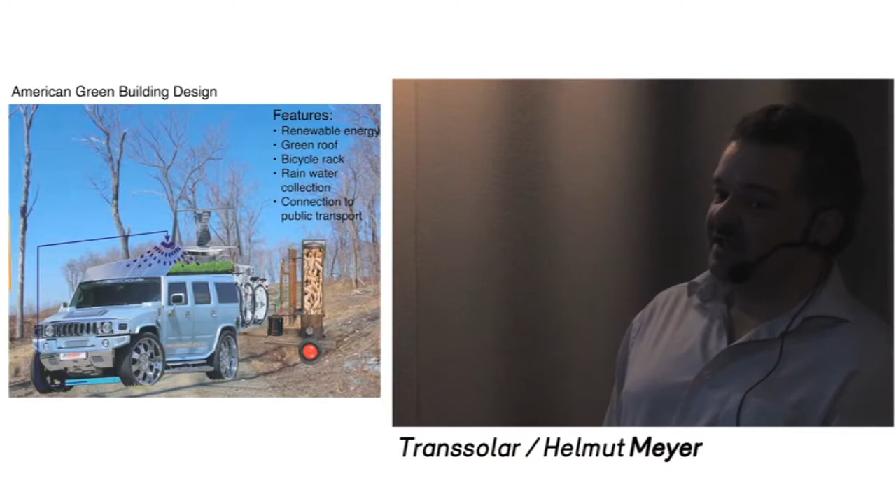So certification labels are really a kind of hype now. I think LEED was one of the first, started roughly 20 years ago. But there's a certain risk of abusing these kinds of systems. Those systems are not a design tool, none of them—not BREEAM, not HQE, not LEED. So it's a good checklist. It was really beneficial for the whole discussion, but it doesn't substitute a holistic design approach.

Taking a usual product and adding green gadgets to it doesn't make a good product at the very end.

So, a couple of examples. I think I have to dedicate a couple of my gray hairs to this project, but at the very end, I think it's a nice piece—the Mercedes Museum in Stuttgart.

The funny part was that first they did the exhibition itself, so the design of the exhibition was done, and that was part of the brief for the competition of the building. So the task was to do a building around this exhibition. Ben van Berkel and his guys did a very good job, but it was a cutting-edge project in a lot of aspects—structurally, and even mechanically, it was really a very difficult project.

Because we had to hide more or less all the technique in the concrete. And if you imagine, we have a lot of steel in this concrete, and then we have to embed all the mechanical systems, air ducts, sprinklers, all the lighting—whatever it was. So site supervision and coordination on site was really a kind of nightmare.

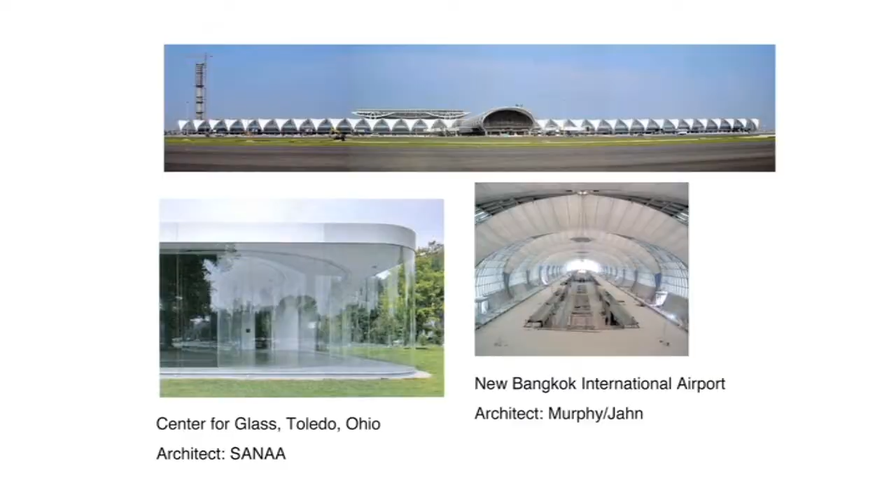Another one of our biggest projects was this airport with Murphy/Jahn, and it was not a typical project for us because we more or less stepped in when the schematic design was done. The problem was that at the presentation of the schematic design, an expert hired by the client more or less tore the whole design apart.

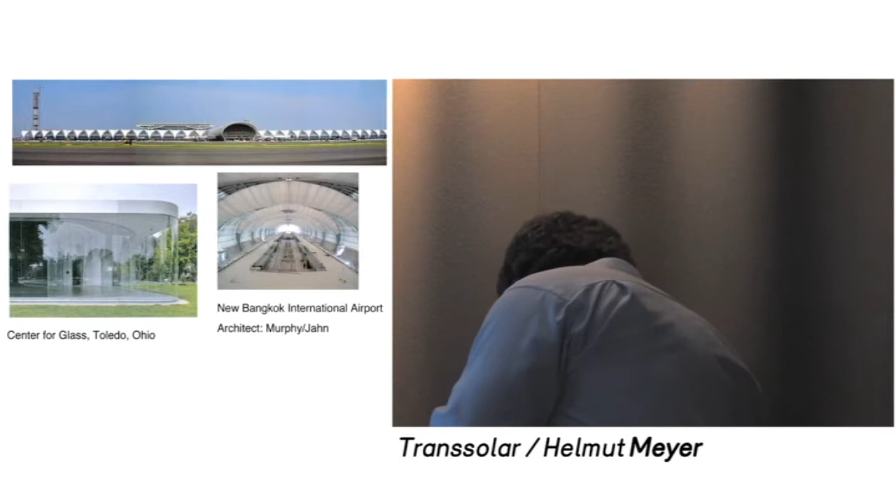Sorry. Tore the whole design apart.

And the architect was really furious after that. It's a $12 billion project, and he said his engineers were assigned to him and didn't comment on anything. The problem was that it was a single skin, so it was too noisy, too bright, too glary, and the climatic conditions were awful. So we worked on improving the design, adding several layers with specific parameters to improve it.

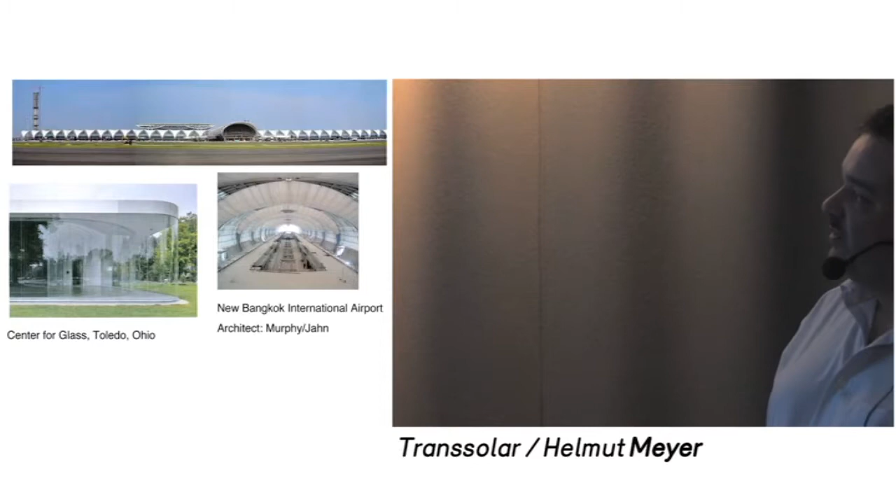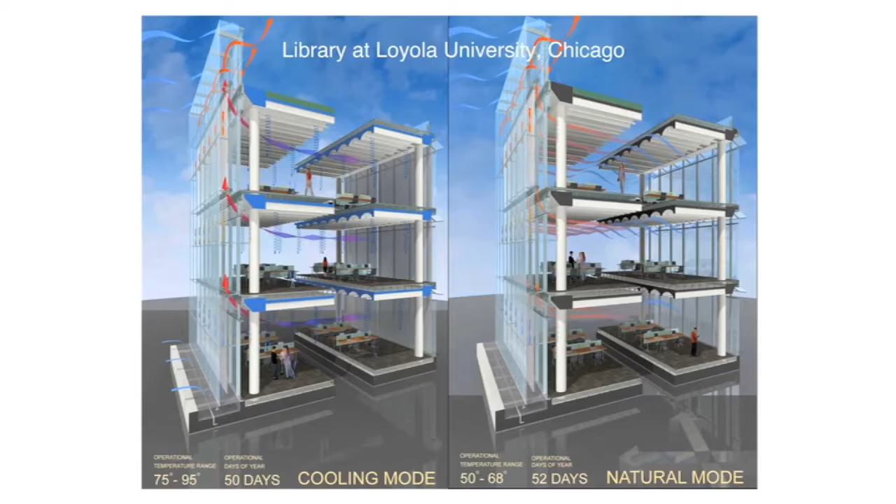This little project we did for Loyola University in Chicago. The requirement of the client was that his students need education, but also a kind of socialization, because it's typically the first time these kids are away from home, so they should learn how to live with people, and it's necessary to provide a place where they can meet. By using all the IT equipment and the internet, he was concerned that students are sitting at home doing everything on the PC and not meeting or talking to each other.

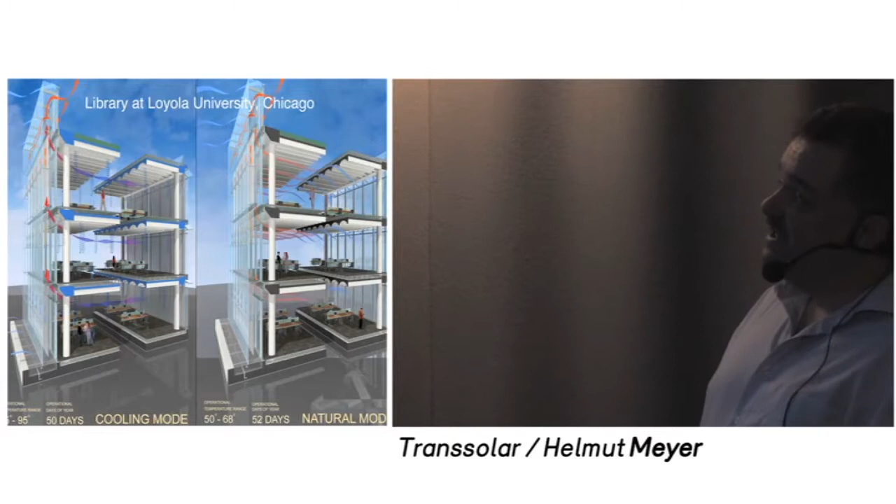So the goal was to do a library which attracts as many people as possible. Looking at the building, it's a very simple building. We have an active slab, and the shape of the ceiling is a kind of reflector of the lighting. This idea of integrating several functions into one component.

Was more or less the driving factor to keep it as simple as possible. Two years after the grand opening, the dean was very proud that even at midnight they had up to 1,200 people in their library, and it's more or less at the lake, here's Lake Michigan, and it's really a gorgeous place to be there.

So what will happen in the future? I think we are out of the discussion that green equals self-knitted socks and eating more organic food in the countryside. And I think even these poor little guys providing energy for this grid-independent building will not solve our problems.

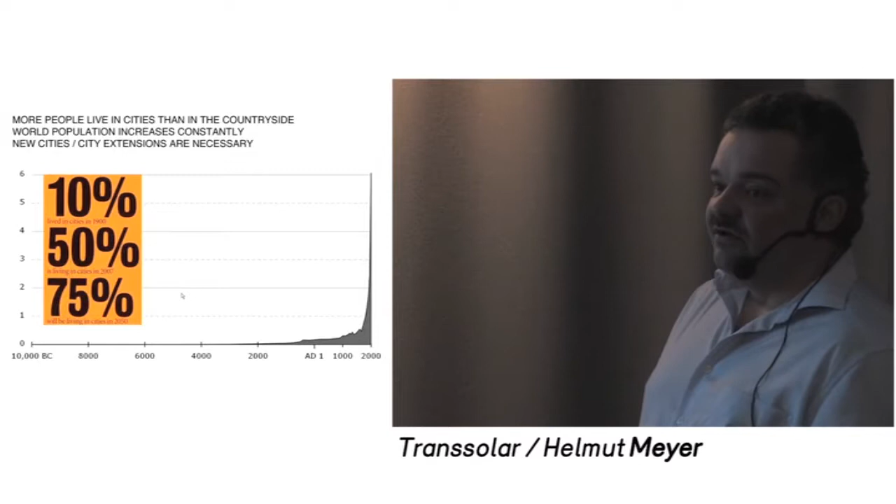So I think the big challenge, if you look at more and more people living in cities, the city itself is one of the biggest challenges in the near future. Maybe not in mid-Europe, maybe not in this part of the world, but looking at Northern Africa, China, India, there is really amazing growth in the cities.

So what are the qualities one needs for cities? I think density has a certain impact on the amount of energy we use for transportation, and also an impact on the quality, the vibrant city life we can achieve. Looking at this kind of suburban culture, which developed from the 70s till the 90s, it's really devastating. So what are the aspects of a green city?

I think for sure we have the energy aspect. Especially, I know Germany very well, and in Germany, sustainability equals energy. That was the main message for the last 10 years. Now we started to open up and consider additional aspects, and I think we are at the beginning of it. It's really essential that we take all these aspects into consideration.

So for a city, outdoor comfort has an impact. And for sure, what is the identity, the local identity of a city. Recently, I won a competition for a high-rise in Addis Ababa in Africa.

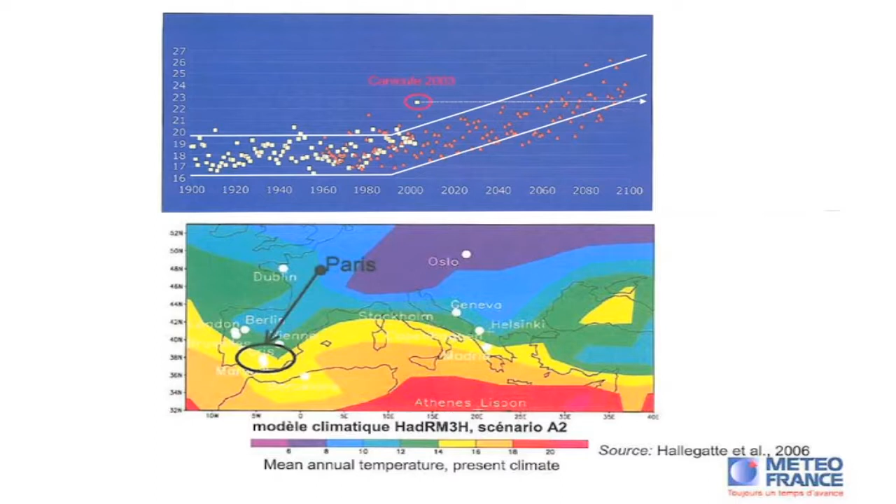Here's a study from Météo-France, and they tried to assess the heat island effect of Paris. So that's the Paris area, and here is the Paris area at nighttime hours. I'm not sure if you can read it, but the temperature in the city area drops from, say, 32 during the day to 27 at night. If you go out of the city to the countryside, the temperature is typically 7 to 10 degrees lower.

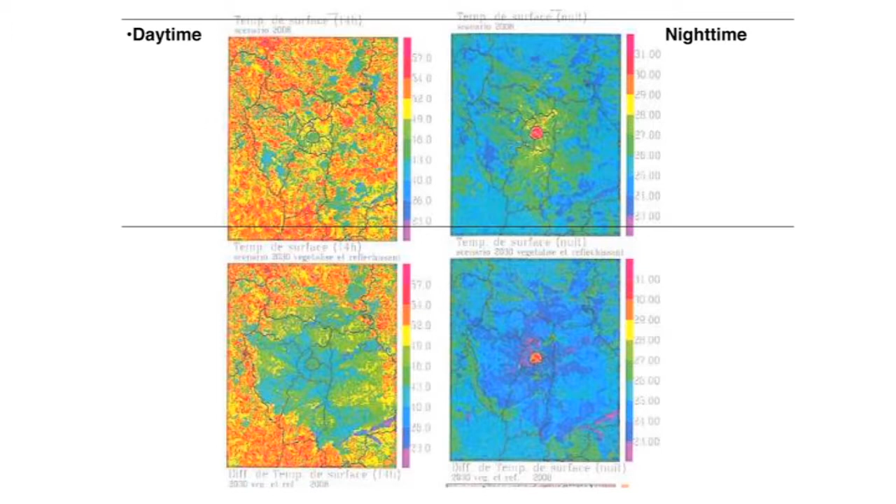One of our typical principles is that we need the thermal mass of a building, using lower outdoor temperatures during nighttime hours to cool down the thermal mass and have a cooling potential for the next day. But in a downtown area where the temperature doesn't drop during nighttime hours, we cannot use these kinds of principles. So what can we do?

In this simulation, they used green spaces in the city, added high albedo roofs, and added green roofs where appropriate. It was a kind of dynamic calculation, and only by these very simple measures were they able to cut down nighttime temperatures to a high degree. So there are ways to do something - there's no reason not to do something.

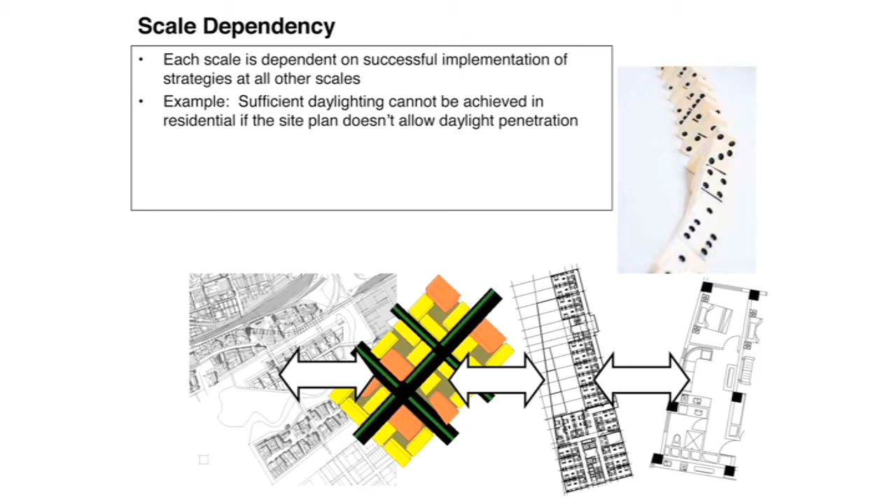This scale dependency is very essential. We need an optimized master plan to get optimized buildings in there. As soon as we have one bad part in this chain, it's really hard to achieve highly efficient buildings. So at each step, we have to apply a high level of scrutiny to achieve a good result.

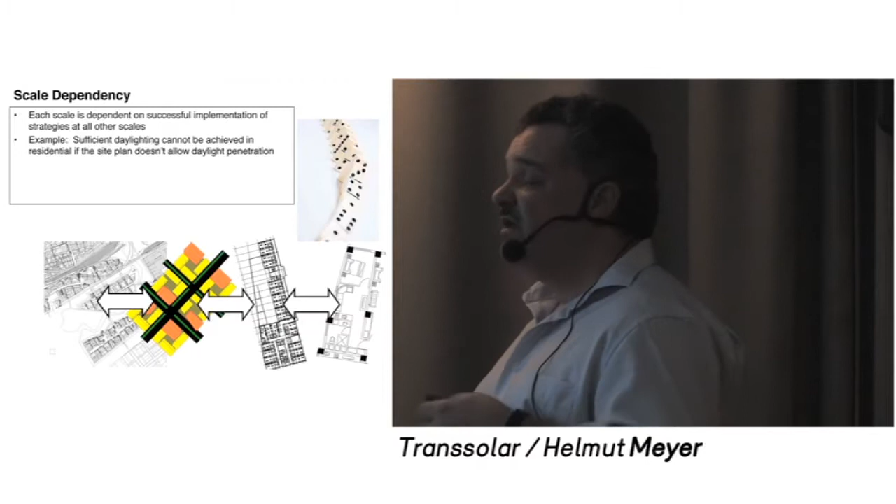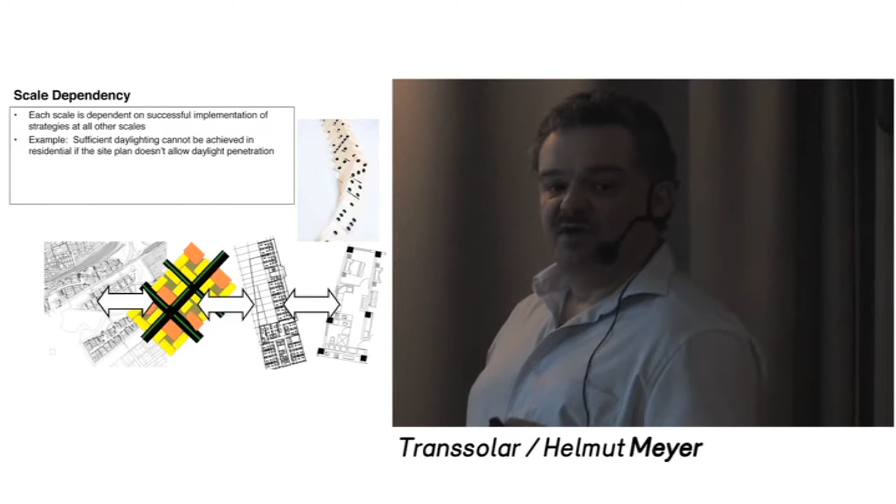Even at the master plan stage, we have this iterative process where the architect came up with a massing study, then there's an assessment in terms of solar and daylight access, wind and outside comfort, carbon emissions, and then it's a back and forth to optimize the design.

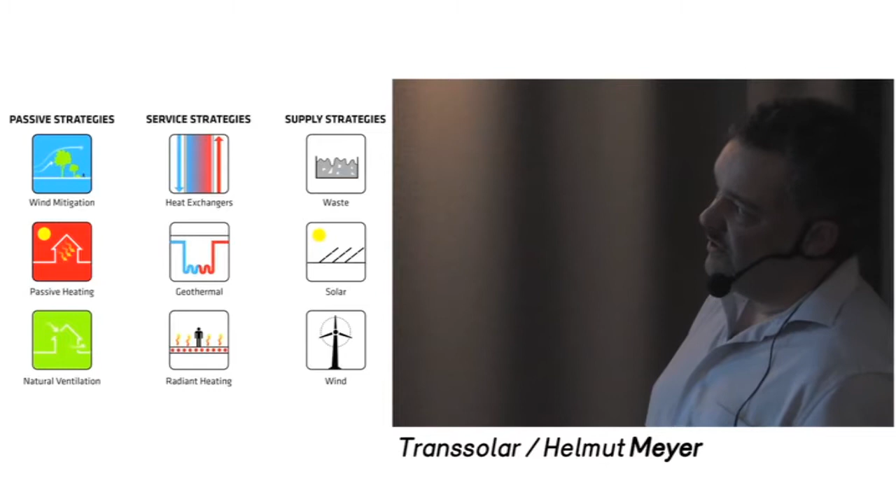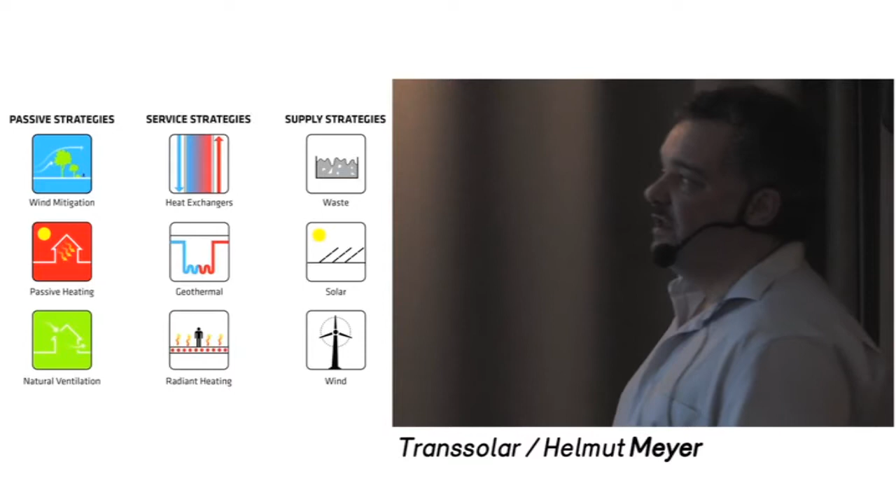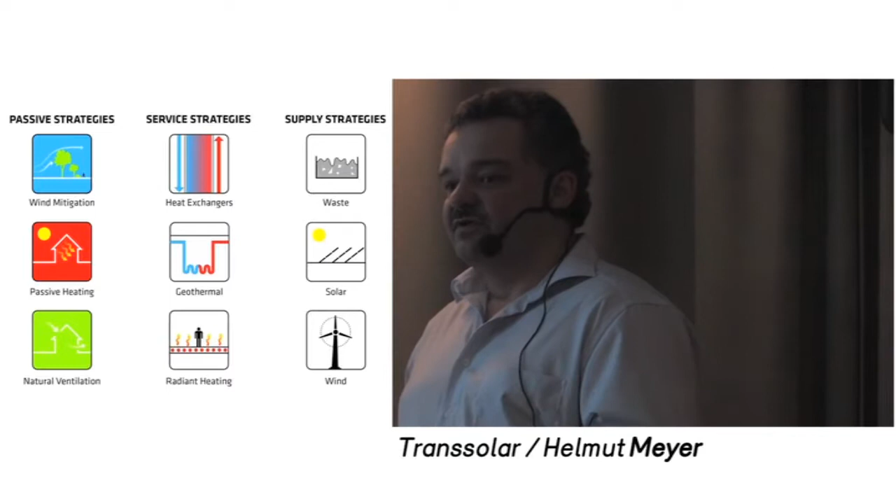Maybe it might look like that. Typically we have three steps in the optimization process. First, we try to maximize the passive performance of the design - wind mitigation, passive heating, maximizing solar gains, or natural ventilation. Then, by defining the efficiency level of the buildings, we could discuss service strategies - what kind of systems we'll use for distributing energy into the buildings, which has an impact on what kind of energy resources we might use. It's not really sequential work because there's a link between each of them, so it's back and forth.

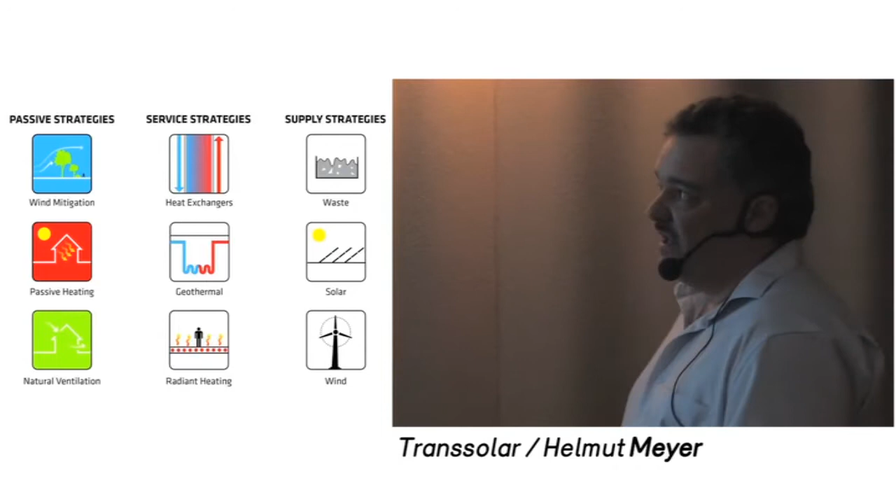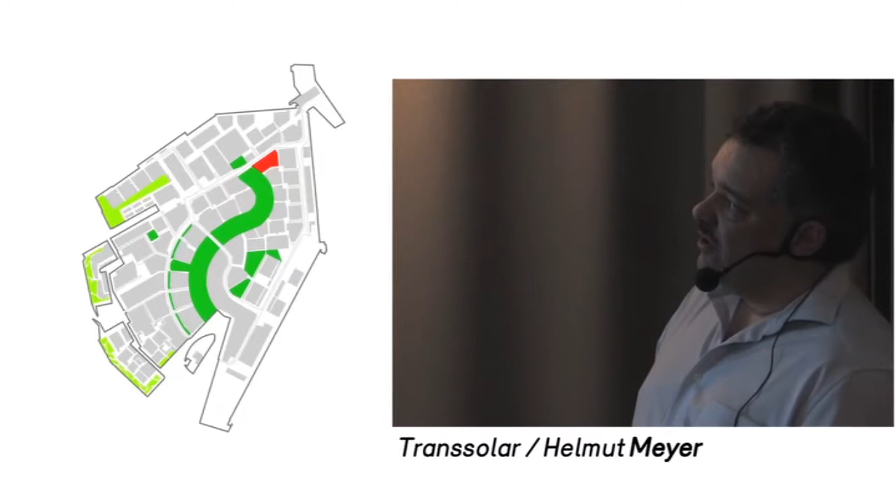A little problem for this competition was that there was an existing master plan, which from our opinion was not really optimum. So now we are following one of these blocks - you can put a block in.

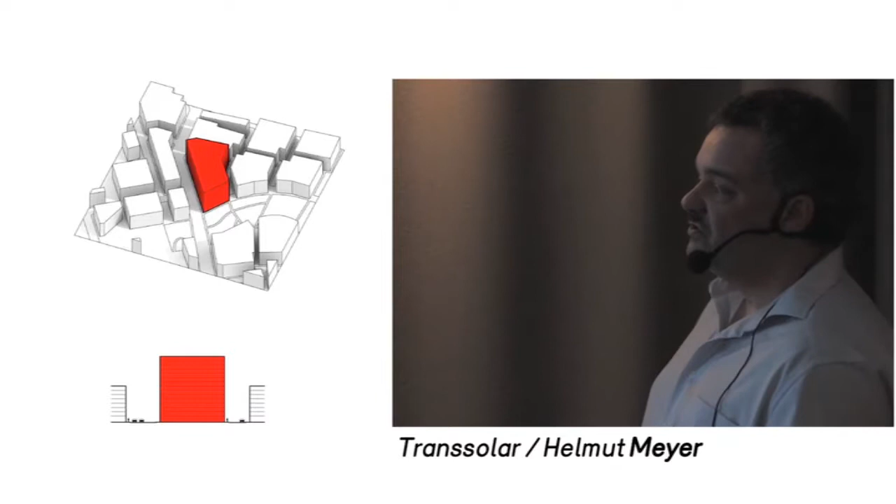At the beginning we discussed, for a city like Helsinki, what is an important impact? The lack of sun in winter seems to be one of the most crucial things. So for south-oriented facades of the neighbors, we want to ensure a certain amount of hours per day of direct sunlight. We cut the roof to make sure this guy will get enough sunlight due to our definition.

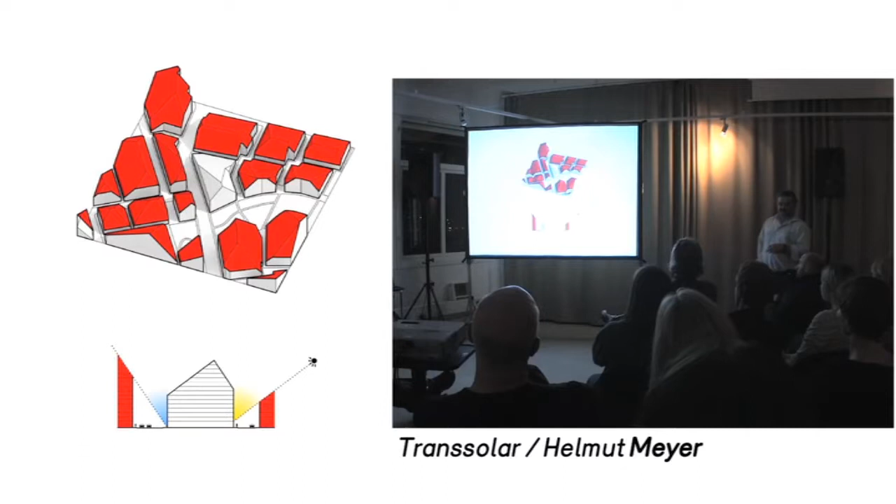For the neighbors to the north, we said they need a certain daylight supply, which gave us another shape for the roof. And BIG was very straightforward and applied these principles to their design.

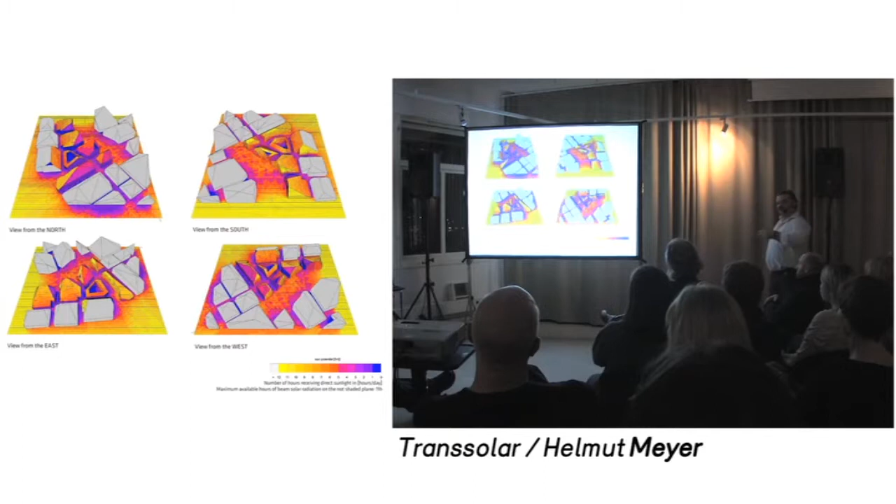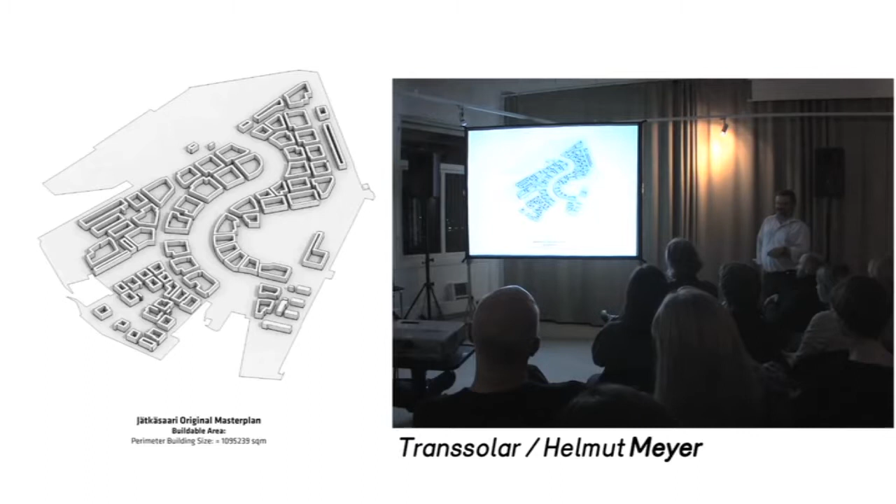Here we had calculations for different setups or areas of the master plan - what is the impact of this shape of the building? I think that was the point when it was clear we would lose this competition, because that was the original master plan, and with our implication we increased the facade area we have to build by, whatever, 30%.

But in an internal discussion, we loved this way of design, so we thought to go on with that.

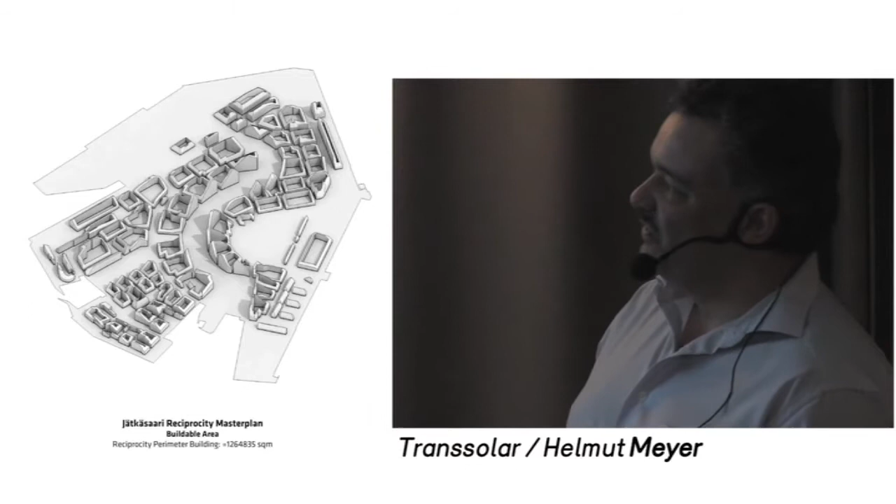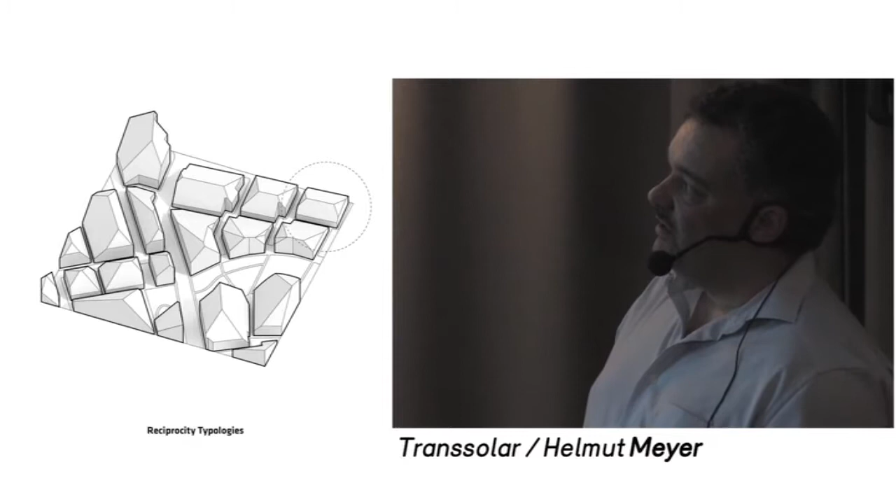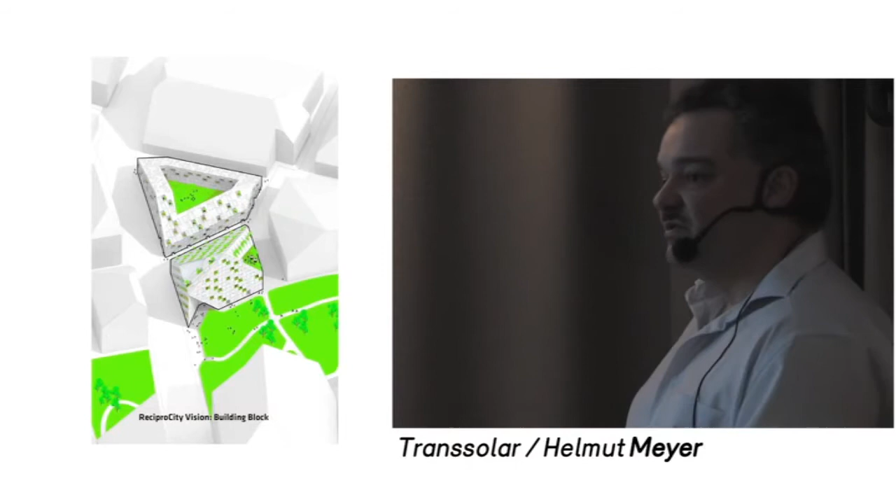So now we're switching from a block or grid scale to this block scale. The architects developed several different approaches, and we did a brief assessment of them in terms of energy performance, or what kind of program might be hosted in these blocks - penetrations for circulation purposes, indoor courtyards - and then how that might show up in the master plan.

What is the ideal program at certain locations in the volumes we created? So office space, more or less, to the north and northeast, and the residential parts elsewhere.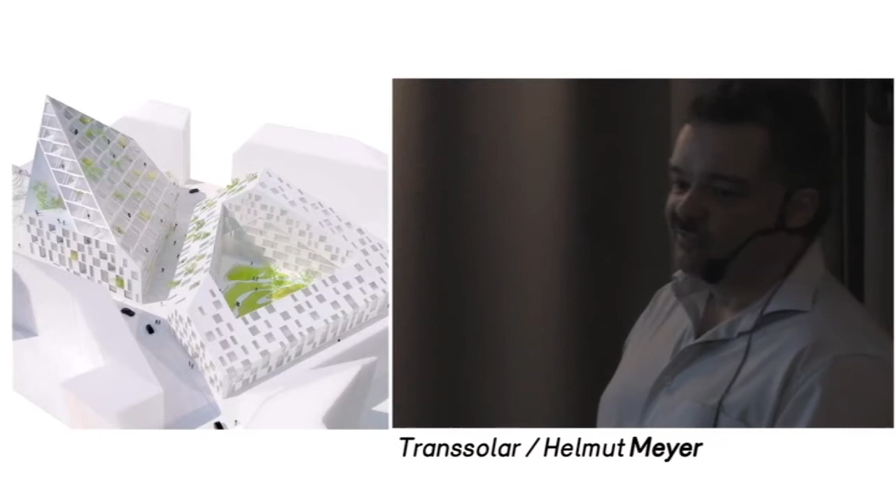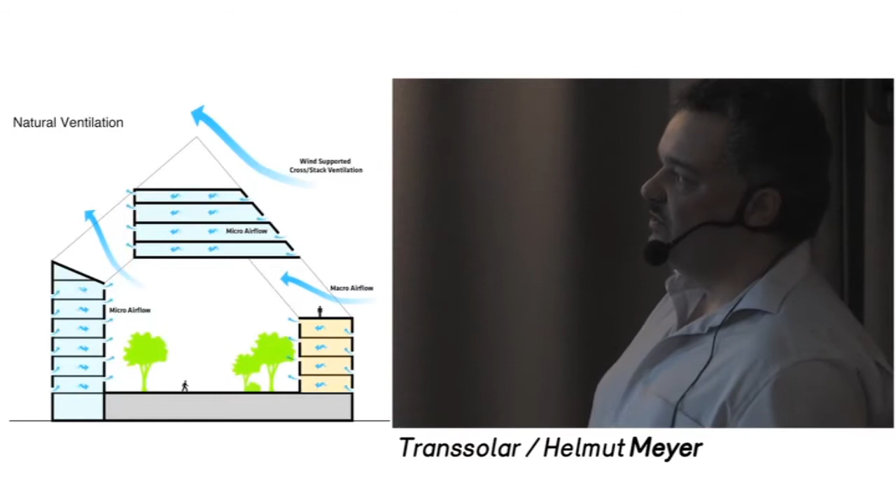And so the architecture more or less showed up out of these design principles, design guidelines. This protected interior courtyards, which allow for sheltered space in winter and open up in summer, so natural ventilation when we have moderate outside conditions, and it closes up and switches to mechanical ventilation in wintertime when we have really harsh outside conditions.

I'm deeply convinced that an operable window, natural ventilation, is a high value, because we made the experience that the more individual impact we provide to the people on their own climate, the less complaints we got. It seems to be a kind of human need to be the master of the climate, at least in my own space.

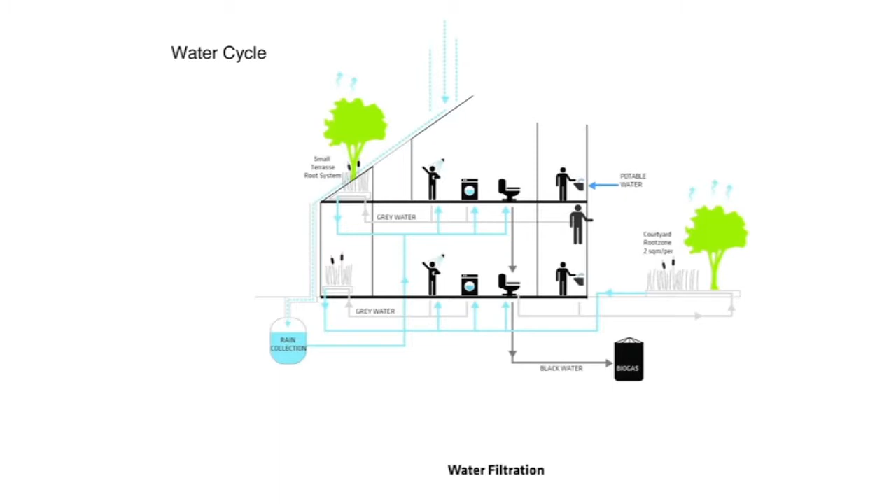And for sure, it's not only energy, also water cycle, so grey water cycle, reuse of water, rainwater harvest. And then when we have optimized the buildings, we could think about energy supply strategies, what kind of energy we might use for more or less covering the needs of the building.

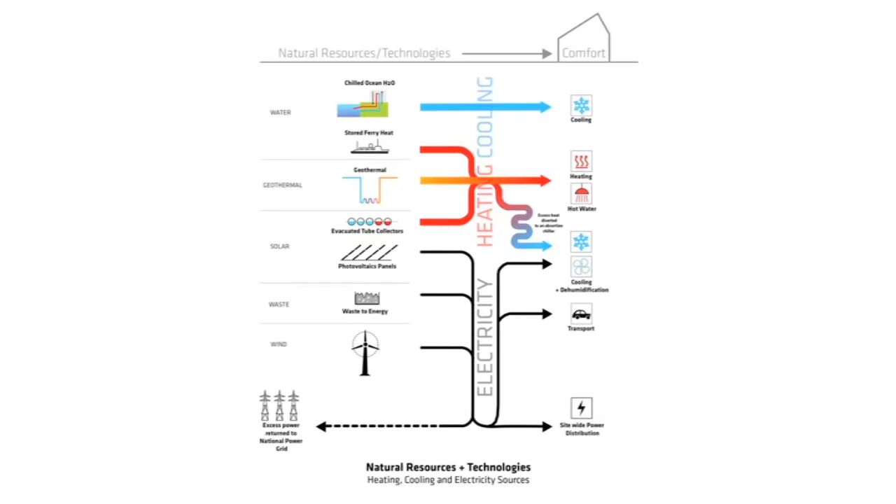And for sure, architectural design is always prototype design. Each site is specific, each environment is specific. And one thing for this area, they have a couple of ferries traveling over the Baltic Sea, so we have a couple of ships approaching the harbor each day.

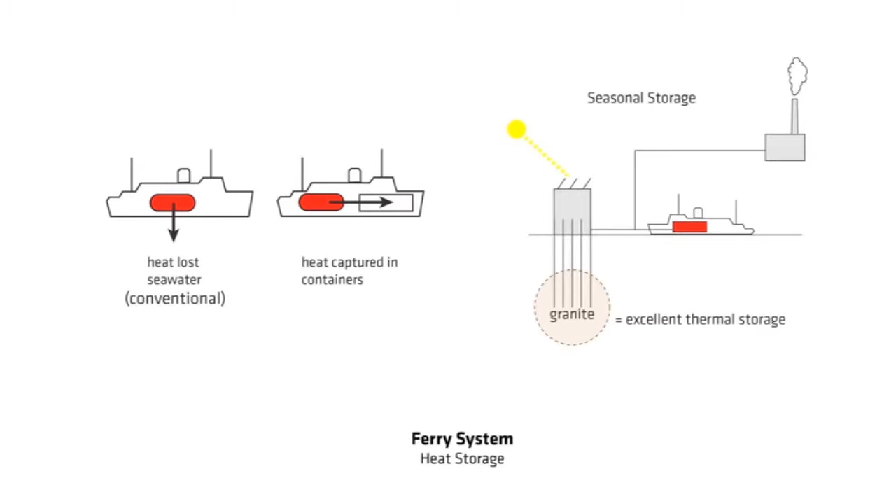And looking on a ship, we have a huge diesel engine, which rejects all the waste heat into the ocean. So the idea was, why not put a container with phase change material, which allows for heat storage, on the ship, and then take it, put it on a truck, take it out, and use it to cover the heating demand of our city. Otherwise, it would heat up the Baltic Sea, so it makes much more sense if it heats up our buildings.

Some impressions. I think this part might be a little bit difficult, but it was really funny, a very dynamic process with these guys, and we had a lot of fun doing this competition.

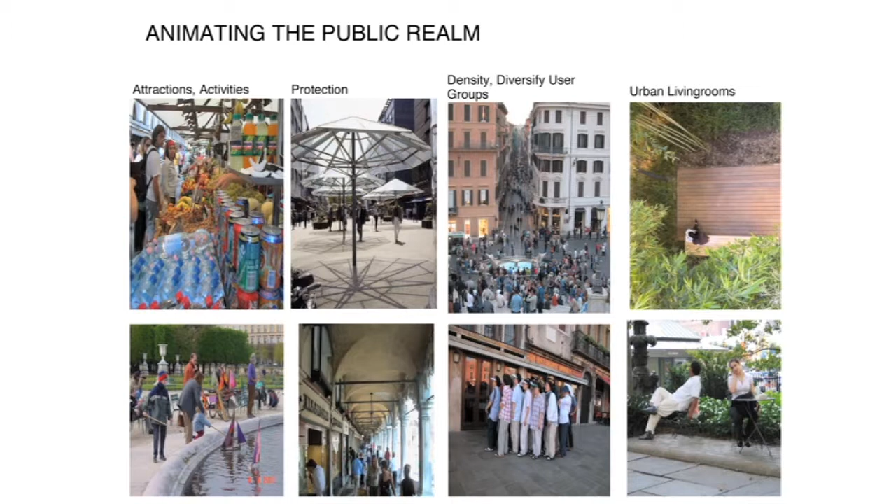Another one we did with a Danish architect from Stuttgart and Gehl Architects from Copenhagen was a competition on a city block, or two city blocks, in Pittsburgh. Jan Gehl works a lot on making the public realm more attractive.

Because he says in the past it was really necessary to go on the streets. You have to go to the market, buy your goods, buy your food, you have to go to work. But nowadays it's not really necessary anymore. You can order your pizza via internet, you can do your job via internet, your bank account. So to get a vibrant city life, to get people on the street, you need certain attractions, an exciting outdoor space. And for sure it has to do with comfort, it has to do with attractions.

He said this kind of city life is really something valuable you want to achieve, which exceeds or increases the quality of living in a city. So that's the city block, and there's a highway more or less separating the city from the river over there.

And one of the ideas was to solve that non-satisfying situation by covering the street, so that it's possible to get direct access to the river, and in addition, due to additional space on top, to make the riverside more attractive.

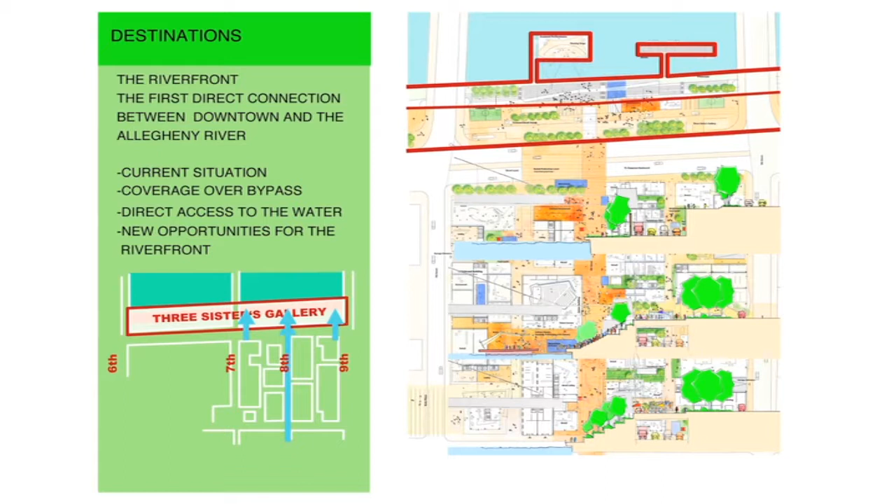In terms of city life, the idea of having fairly narrow passages widening up to these places is an old idea. I think each Italian city with a historic master plan has this kind of setup.

Looking at the climatic data, we figured out that especially cold winds in winter approach the site from this direction. So the idea was to close off the site here, providing only small passages, and open up here, because here we have the appreciable summer breeze, improving the outdoor conditions.

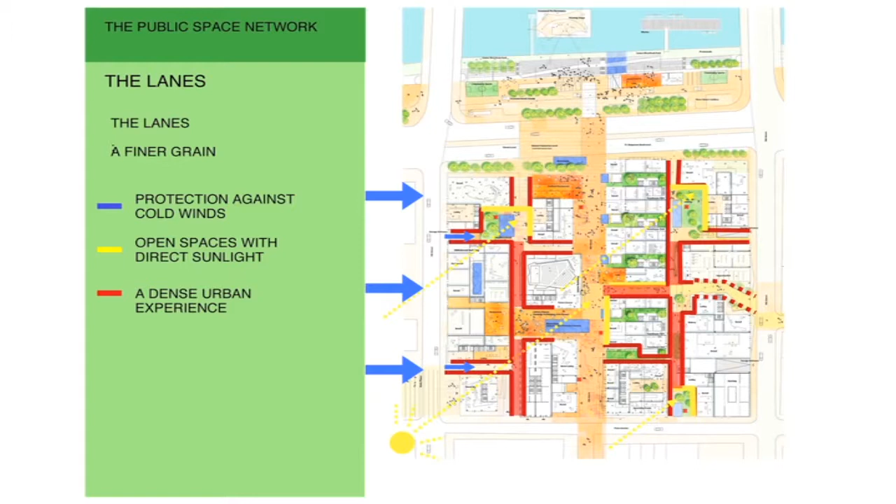Sunlight for sure was a big deal. So that's the idea of this dense urban experience, which is not really typical in American cities.

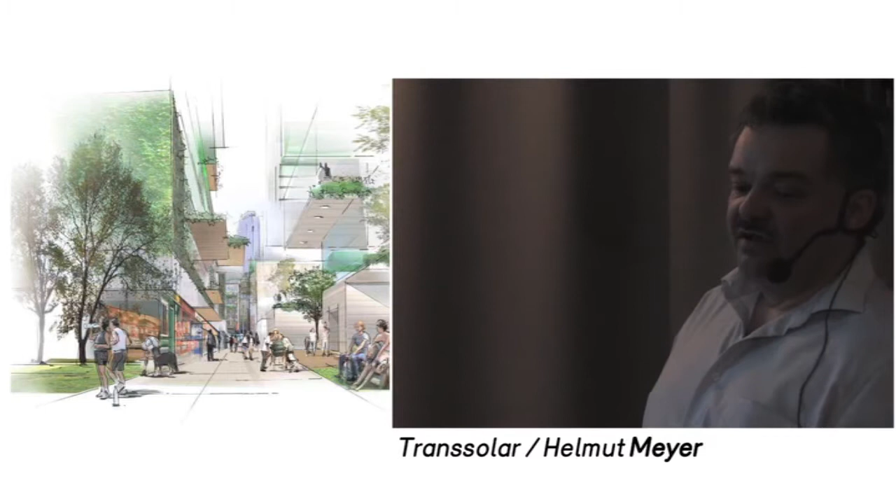And what we typically do is, at the beginning, support the architects with massing studies, and now this shading study, we are the sun, and we're following the sun more or less around the site. So each surface you see now will more or less receive direct sunlight, and we can see at which time of the year we have direct sunlight, especially in the public realm.

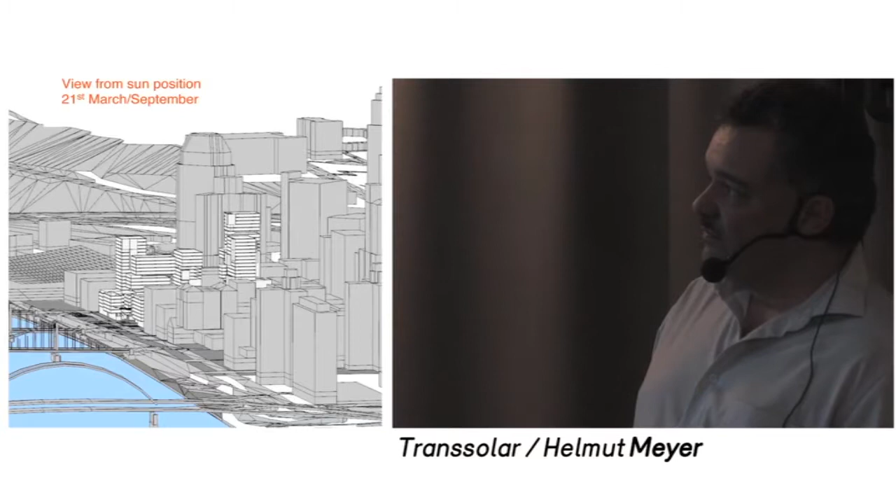So we won the competition, and the city is now in negotiation with the third developer, so we will see what happens. This project suffered a little bit from the financial crisis.

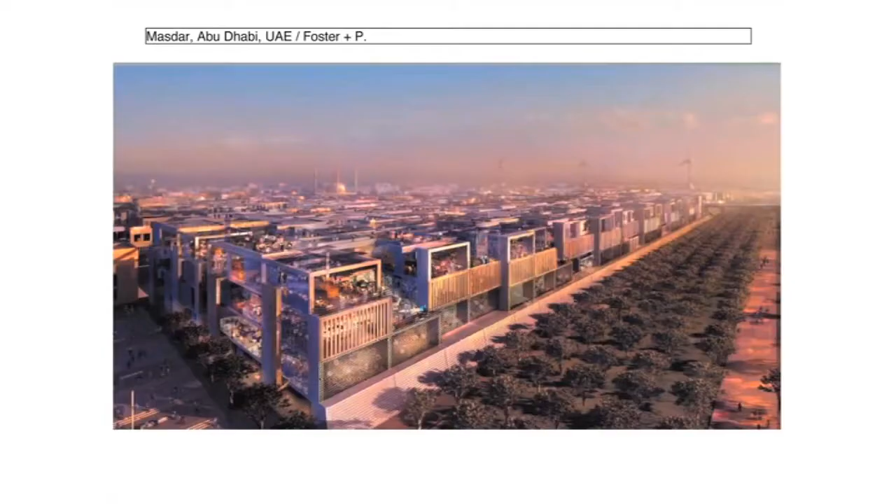I only want to talk very briefly about Masdar. It's a very ambitious approach. We worked with Foster & Partners and a big team, more or less on achieving the very ambitious targets for this project. The idea is to do a new city in Abu Dhabi, focusing on research, a kind of center for research on renewable energy and sustainability.

And it should be more or less emission-free. Here we did a rough assessment of different design approaches. If you see the perceived temperature, in the desert we end up, in summer, at roughly 67 degrees. The typical setup in Abu Dhabi center is even worse than in the desert. By applying American-style skyscrapers, you worsen the conditions significantly.

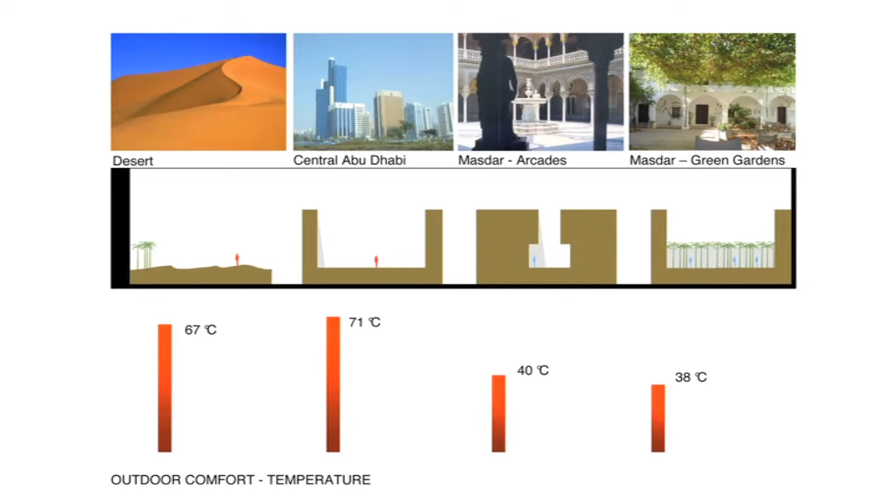Here we compared the approach for Masdar and the conventional city. I think a very interesting point is the contribution of the buildings. It's the highest reduction potential we have, close to 60% or 55%. So by improving the performance of the buildings, it's really one essential step towards a sustainable city.

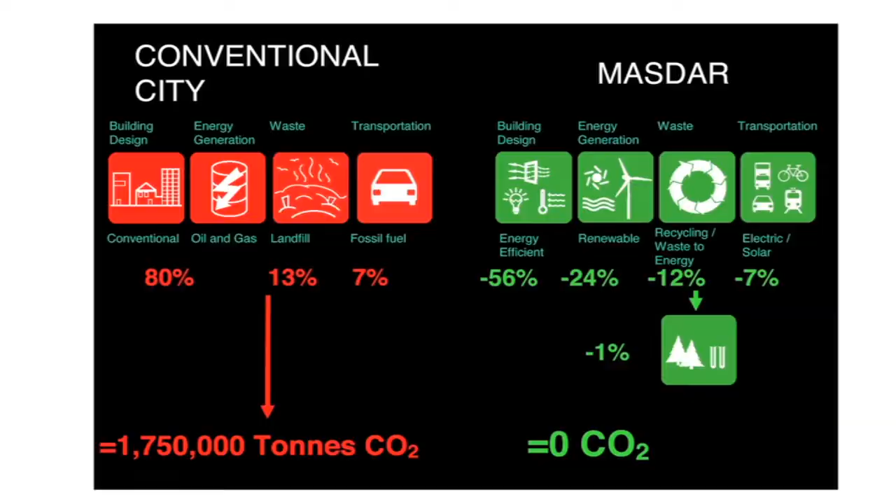Here we identified the required reduction to make it possible to cover the remaining energy demand by renewables, because the space is limited. There's no endless space where we can put solar collectors or whatever. So compared to the typical energy demand of a household in the Arabian Emirates today, for residential we have to cut the demand by more than 80%. So people are losing more or less 80% of their energy, and only 10, 15, 20% will be available to cover their needs.

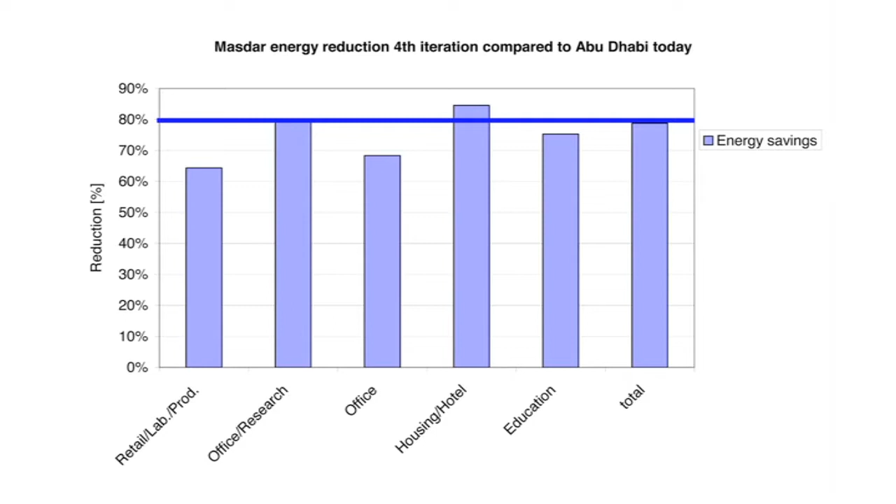So that means we have to do a lot on the performance of the building, but we also have to work on personal attitudes. We cannot do these big changes only by adding sophisticated technology.

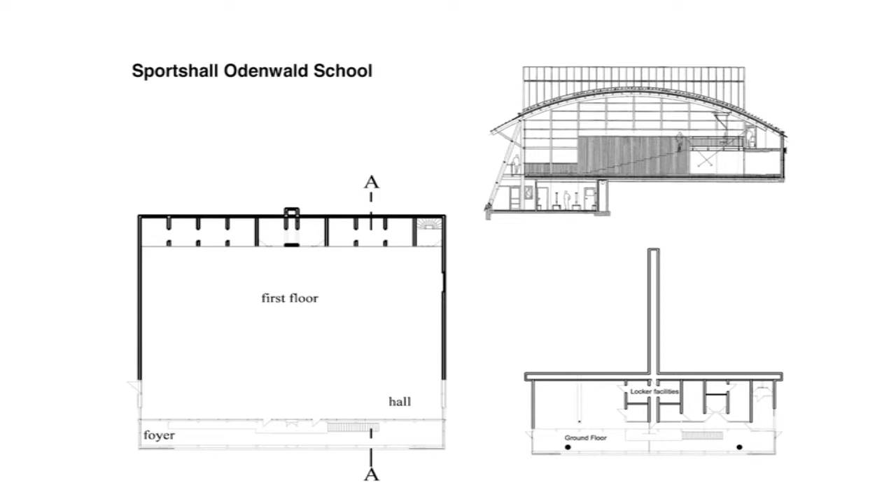We reinterpreted it. So we used the foyer, the fully glazed foyer, as a solar collector preheating ventilation air. We added a small fan in the partition wall, driven by a PV, and so we take air out of the foyer into the hall in wintertime.

The whole thing is driven by this glazed roof, which was integrated to improve the daylight, but also to host the curtain separating two parts of the hall, because due to the curved roof, it was not possible to put it anywhere else. We use it as a solar stack, so the sun is overheating the exhaust air, more or less fostering the stack effect.

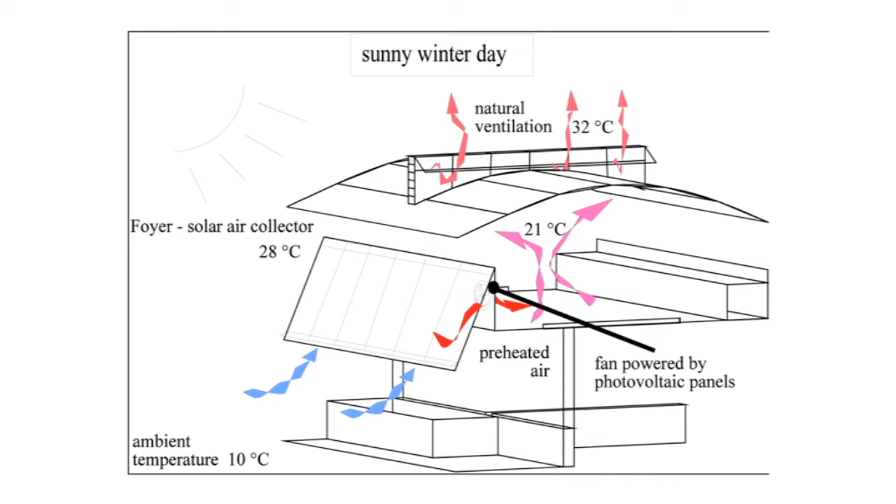So we switched from a mechanical ventilation approach to a more or less fully natural one. We doubled up this stiffening rib so that we have a kind of duct, and we enter in summer from this side, having a kind of pre-cooling of ventilation air, and then bringing the air at these parts of the wall. Each heat source, even this little spot heated up by the sun, creates a plume, so air is moving up and sucking fresh air out of this fresh air lake. So we have a very efficient ventilation system, with more or less no additional effort.

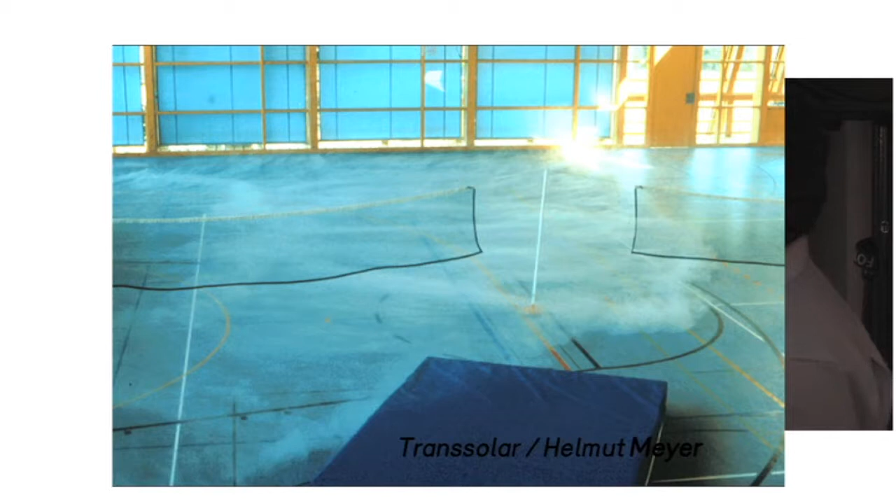Now, what works for a small building works also for a big building too. And this one is quite ambitious. The client, the KfW Bank, is a public bank in Germany, and they're more or less in charge of all the programs subsidizing energy efficient buildings. So they are very keen to achieve a high level on their own buildings, as an example.

And the goal for this high-rise was to achieve an energy consumption less than 100 kilowatt hours per square meter per year, primary energy, which means that, for example, electrical energy is rated by 2.8 in Germany, considering all the energy which is used to produce the electricity.

So we ended up, let's say, roughly at 50 kilowatt hours per square meter per year in energy, which is really ambitious for a high-rise, because we have to cover all the circulation, elevators, all this kind of stuff.

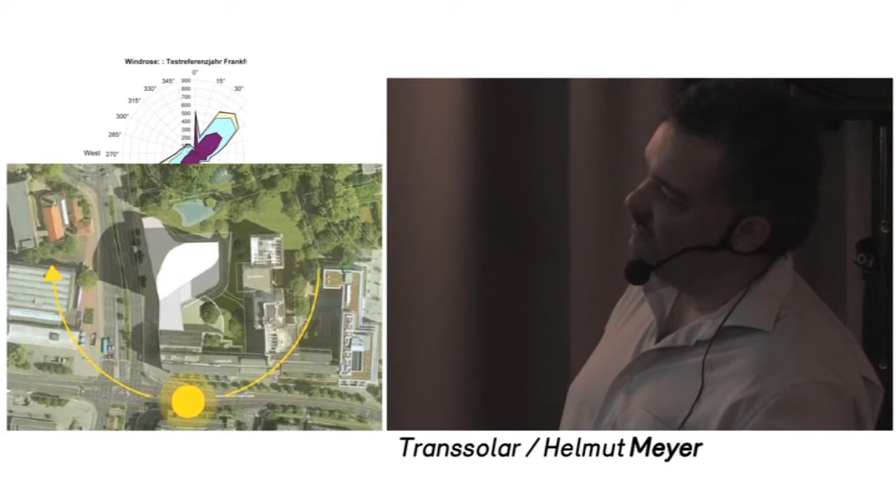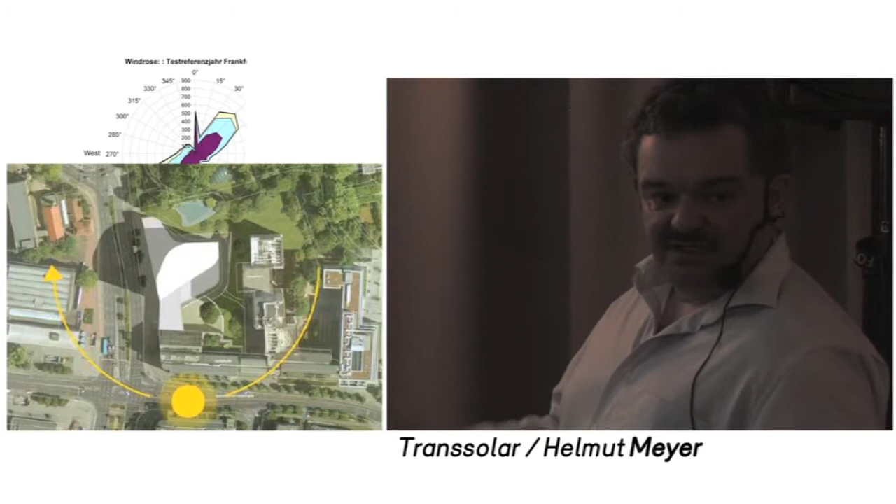Looking on the design - it was funny, there was first the architectural competition, and then we came up on the team on the client side, so this design was more or less there already. And here we have the wind rose of Frankfurt. If you're looking on this building, the shape is more or less directly into the main wind direction. We only have to switch the building a little bit to get it exactly into that direction.

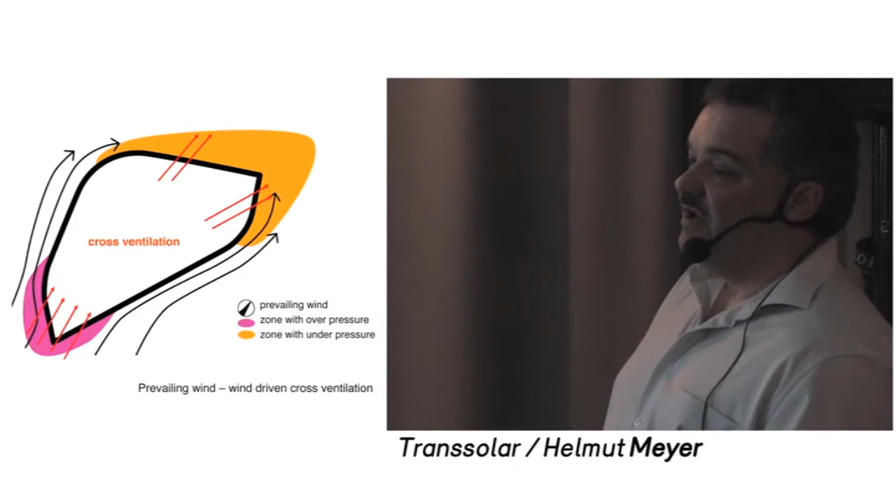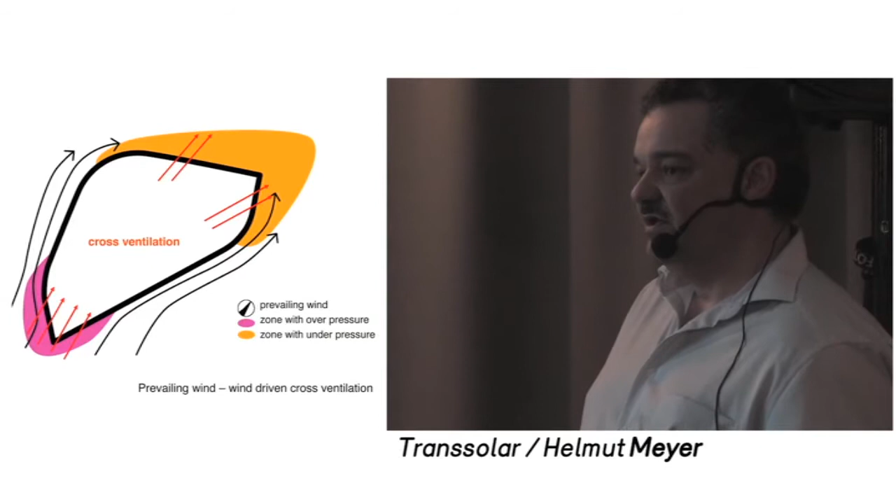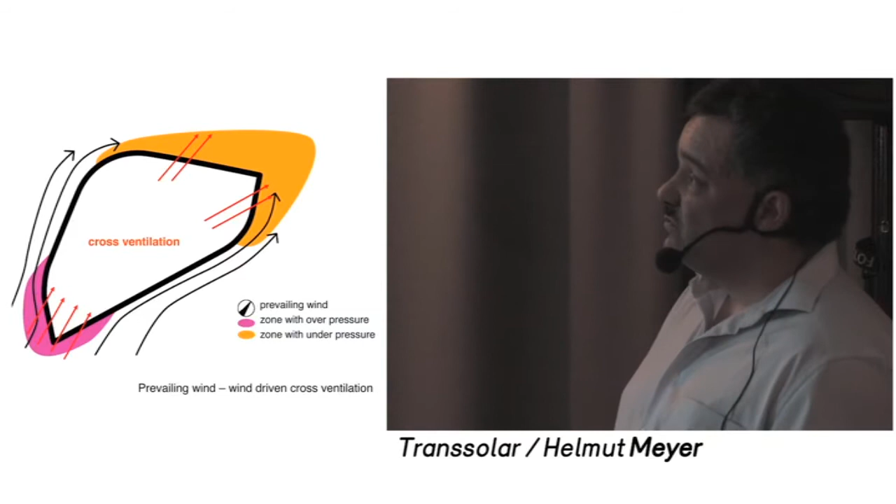Because the problem on a high-rise is - I have to add, a company standard is operable windows. All of their buildings have to have operable windows, otherwise it's not possible. So this combination, we have a fairly low energy demand, which is allowed, and we have operable windows, which are required. This creates a problem as soon as in wintertime we have wind more or less hitting the building. We get a high pressure zone in the wind direction and a low pressure zone vice versa. So as soon as somebody opens a window here and another one here, there will be a big rush through the building and we're losing a lot of heat, which we have to avoid to meet the requirements. So the question was how to deal with that problem.

The architect had in his design for the competition a fairly simple double skin facade, and we changed it a little bit, more or less to achieve a new function for it.

The idea is pretty simple. We collect the wind here and redirect it into the double skin facade. We have flaps, controllable flaps at the end here, so we can control the amount of air leaving the double facade. You might compare it with the tire of a bicycle - if you pump it up, there's more or less the same pressure in this tire at each position. Exactly the same happens here. We have a big pressure drop around the building with high air velocities, but by limiting the velocity in the double skin facade, we reduce this pressure drop to a very low level. So now it doesn't matter if somebody opens a window here or here, it's always possible.

So we increased the times where natural ventilation is possible roughly by 80%, adding these principles. The building is now in operation since roughly 3 months, so we have a first feedback, and for sure a certain adjustment is needed, but the first results are really promising. In summer, where we don't care if there's cross ventilation, we can open up all these flaps to minimize the high temperature in the double skin facade.

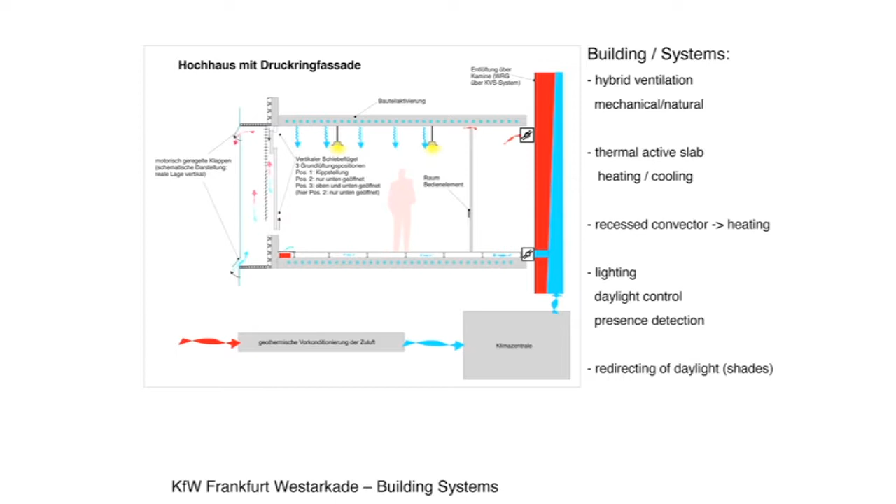So we go to a next high-rise, really a completely different climate. It's in Winnipeg, Manitoba. And checking where Winnipeg, Manitoba is, I realized that we are far up north - it's roughly 1,000 miles north from Chicago. So we have really extreme weather conditions. It goes down to minus 35 in winter. They have 4,000 hours below freezing. But even in summer, we have a 6 to 10 week period where it goes up to 35, 38 degrees.

And we really have a high humidity in summer, so we have the combination of really cold in winter, but hot and humid in summer - it's a really continental climate. Really extraordinary is the solar insolation. Looking on the winter months, we have more or less 2 times the insolation we have in mid-Europe. So we have the combination of a very cold but sunny and bright climate, and the wind direction is really very clear, north-south.

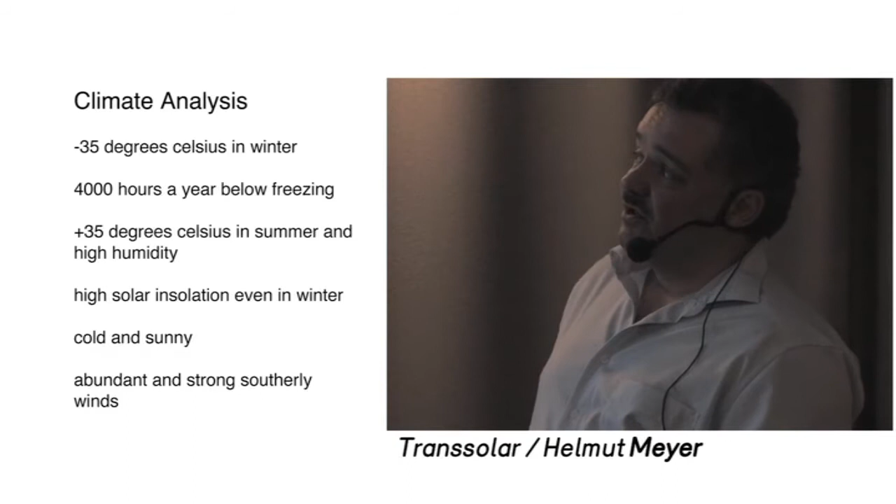So it was a very untypical project. We started with a charter, so each consultant designed a charter defining the goals for this project, and also the client signed it. We got 4 months in front of the start of preliminary design, because we could convince the client that this time is the most important, and rushing at that time doesn't pay back.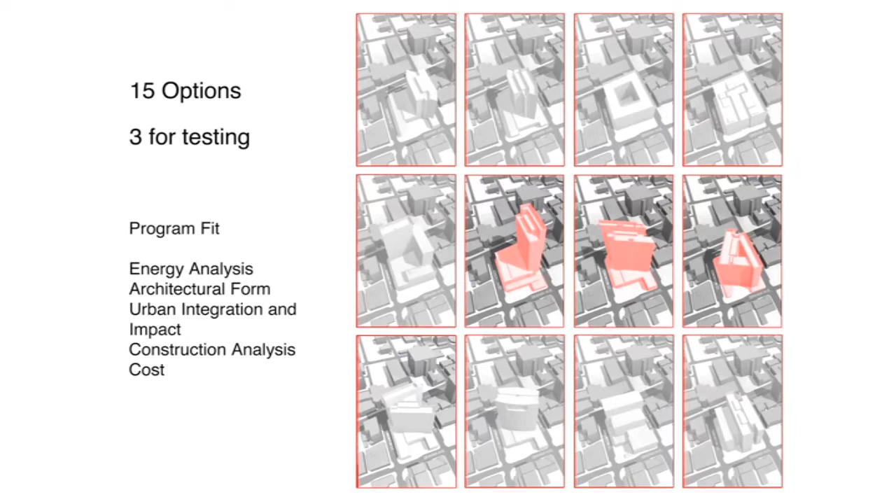So the architect started with, I think, more than 30 massing studies. We did a rough assessment of each of these studies in terms of energy efficiency, daylight, wind. We cut them down to 15 options. For these 15 options, we did brief calculations to get a closer look at the performance we expected. And then we selected 3 more or less for further assessments. For these 3, we did detailed simulations.

Daylight Tower was more or less a slender high-rise. Comfort Tower was the most compact building, so we had the best volume to heat-exchanging surface ratio. And at the very end, the Solar Tower made it.

So we have a V-shaped floor plate. It opens up to the south, more or less to get as much solar gains as possible, and it closes up to the north. This high-rise, I think, was the first high-rise downtown Winnipeg in roughly 20, 15 years.

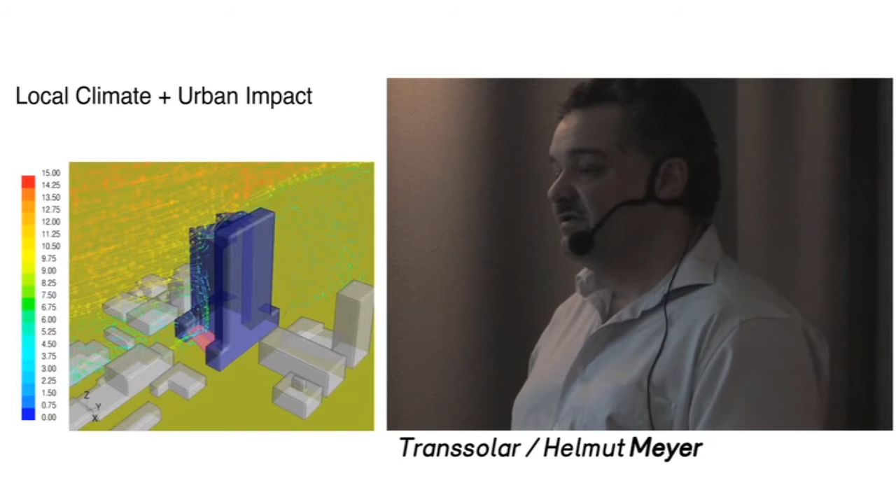So we had a lot of discussions with the neighborhood, which has a big impact on the design, on the permitting process especially. So, for example, we did a lot of shading studies - what is the impact on the neighbors? And for sure, because we have this big south-oriented facade in the main wind direction, the question was, how is the deviation of the wind?

What happens here? For example, one of the results of these calculations and assessments was a big cantilever roof in front of the main entrance, because the facade creates a downdraft here, so we had very high wind speeds at pedestrian level at the main entrance.

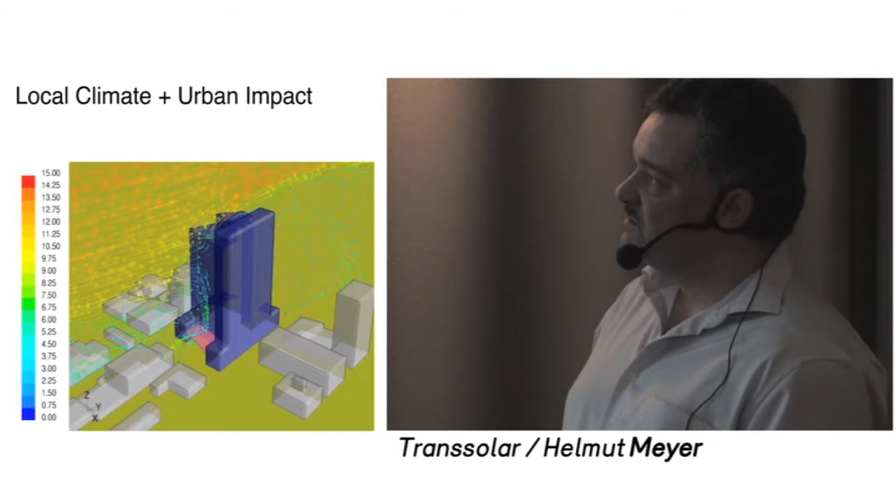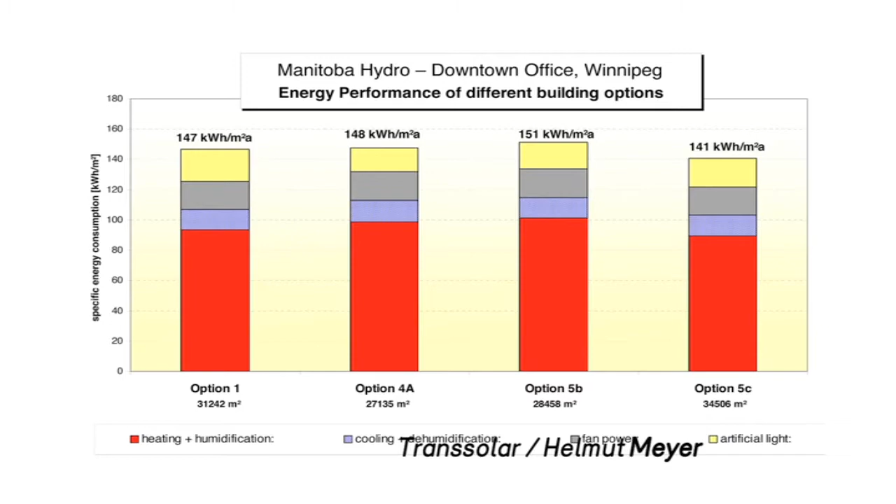So we did energy assessments on these options, more or less to provide the selection, and at the very end we came up with this concept. So we have the south winter garden, which is naturally ventilated even in that harsh climate, roughly 40% of the year. In winter, we're collecting most of the solar gains. It's used as a preheating area for ventilation air.

We have small air handling units on each floor, taking air out of the atrium space in an underfloor air distribution system. And we have a solar stack going up here, which is more or less to travel the exhaust out of the building.

The conditioning of the space is done by the active slab. We use it for heating and cooling - cheap and efficient - so that the ventilation air is more focused, more or less covering the hygienic demand of the people in there.

The energy supply system is based on 280 boreholes underneath the building. Considering the temperature level, we can use the water out of here directly for cooling into the active slabs. We don't need a chiller for cooling - chiller capacity is only required for dehumidification. And in winter we use the same system for heating purposes with a heat pump.

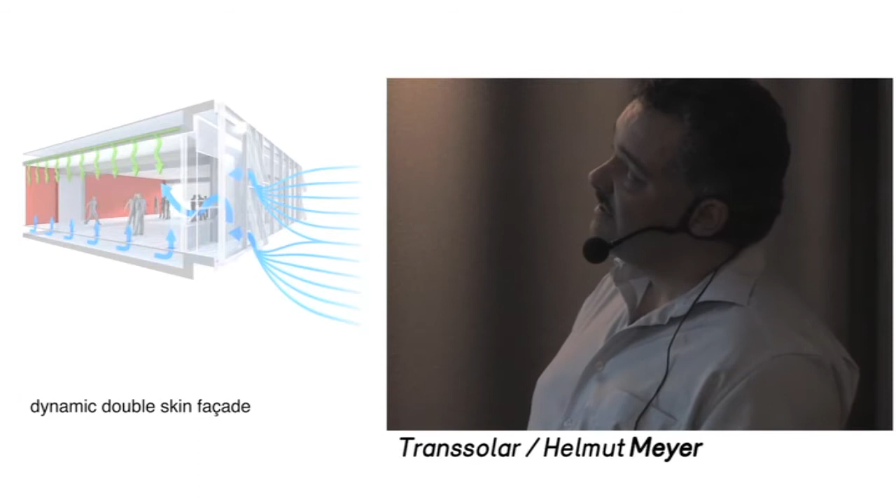The facade opens up because, as I said, roughly 30% of the year we can do natural ventilation. So we switch off the mechanical system more or less completely, and the facade opens up automatically. There are sliding doors at the interior, so each individual can control his own work desk climate.

A very important part is this south-oriented atrium space, so we have openings at the bottom and at the top. In summer we have interior shading here, which is ventilated.

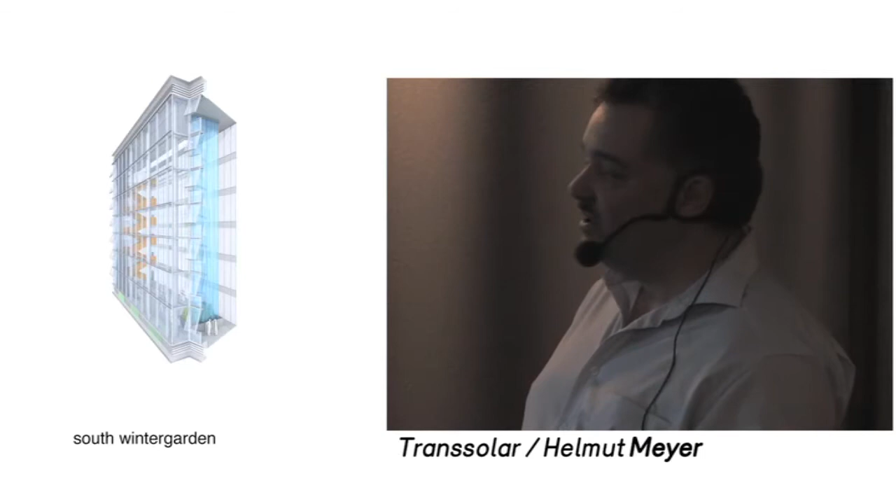And we put, I think it's hard to see, a water wall in there. There are little cables running down here, roughly 30 meters. The idea is to provide humidification in winter because we have very low outside temperatures and the air is really dry when it gets in.

But we also use it for dehumidification in summer. It sounds a little odd to use water for dehumidification, but it's simple physics. If it's cold enough, the air condensates more or less at this cold surface, and that's exactly the effect we need.

At the very end, the client started with the requirement that he puts a certain percentage on top of the budget, but he wants to have the greenest, most sustainable building in North America. We found, with the architects, a partner who was like-minded, and we tried to integrate this kind of approach as good as possible into the design.

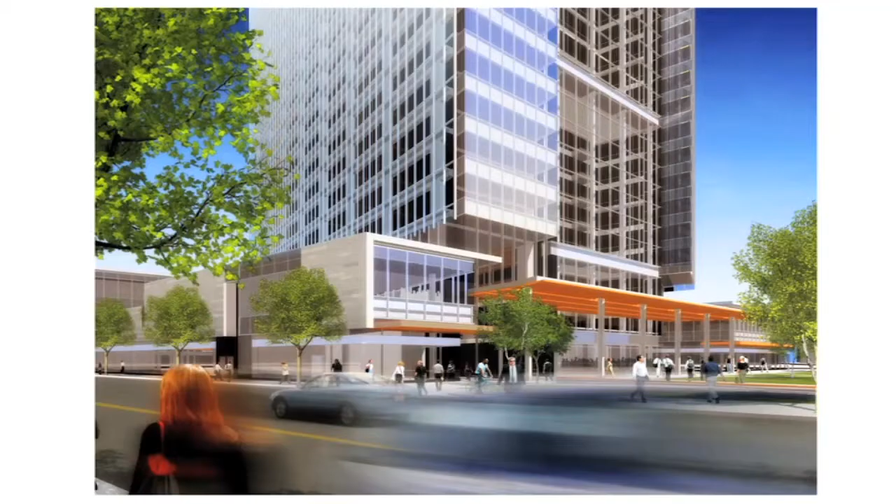For example, if you look at this solar stack, it becomes more or less a signature of the whole building. So for sure it was a discussion how that thing should look, because the impact of the impression of the building in general was fairly high. You see the atrium space, and for sure green roofs.

Roughly 2 years ago, the first employees moved in. Now we have roughly 2,000 people working in that building. The client is really very pleased with the press he got with his building, so now they have more than 3,000 visitors. I think it starts to get a little exhausting to tour all the people through the building, but they're still so proud that they really love to show what they have now.

It was funny, there was an intensive discussion with the employees because they were scared to go downtown. Nobody knows exactly why, but one explanation was they watch too much American TV and get the idea that downtown equals dangerous. But they collected more or less these 2,000 people, who were distributed all over town in small units and collected them in one building. 70% now switched to public transport.

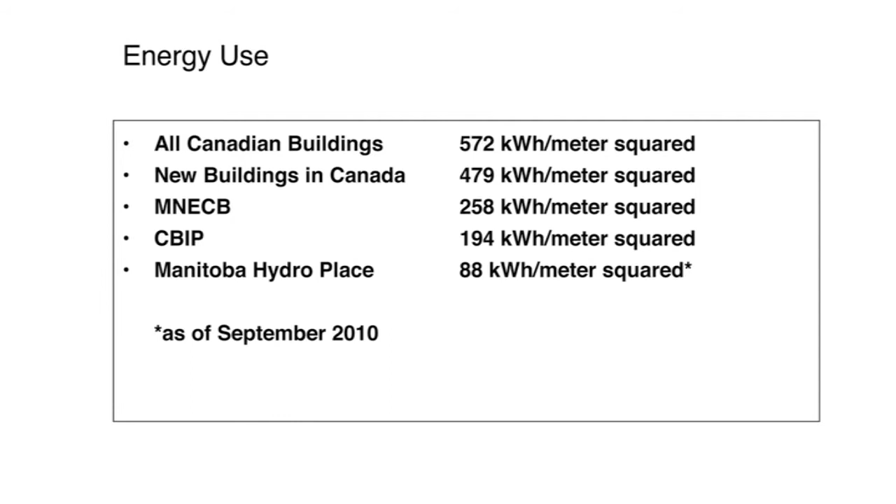Looking at the press the client got with his building, I think he's very pleased. It runs through more or less all of America and Europe.

We did an exhibition at the design school in Winnipeg, which was really a big success, and we got a couple of awards for it. Credits to the team.

Now we're switching completely. We're in Syria, Damascus. A French architect approached us and said, I have a nice little project, it's a school, but it's in Damascus. So we discussed who is willing to go to Damascus. It was a long discussion.

The budget is very limited, and it has to be simple, it has to be robust, because the French government donated it to the state of Syria, but they have to cover the operational costs on their own. Those are poor guys, so do what you can.

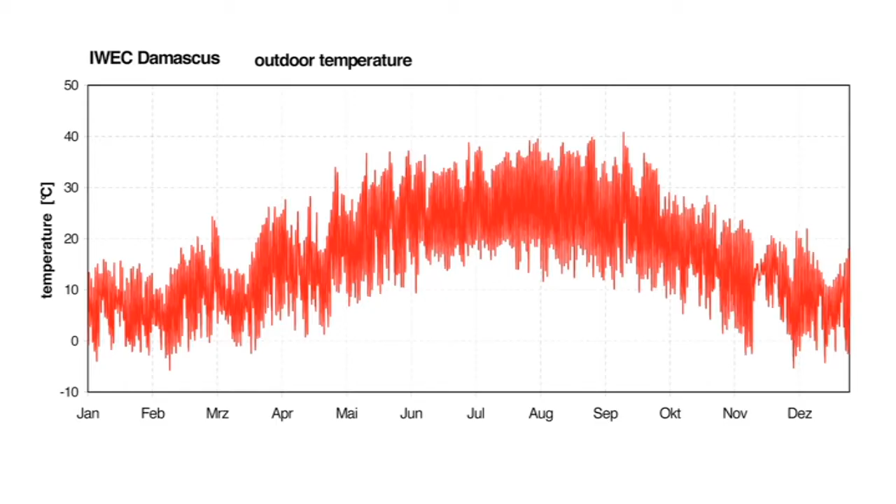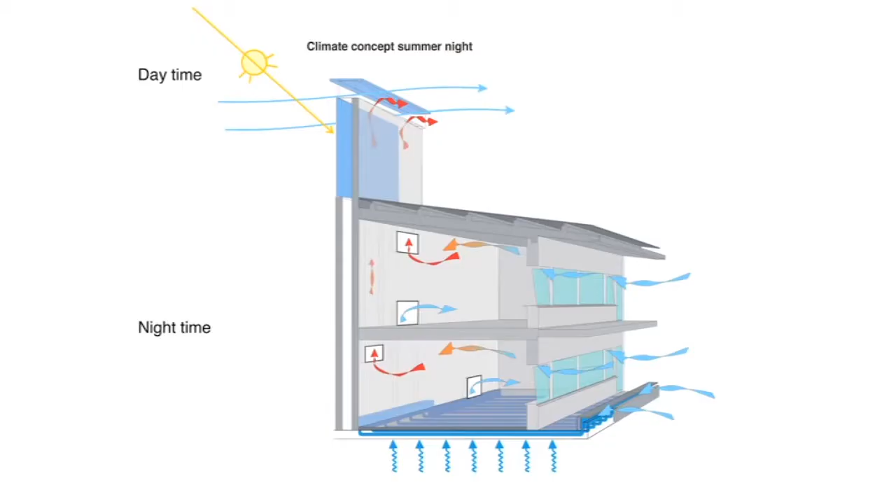We have retractable shading for these courtyards, plants. The idea was, in nighttime hours, we ventilate the building to take benefit of the thermal mass. During the day, we have...

...ventilation through what we call an earth duct. It's a non-insulated air duct, more or less buried in the ground. The idea is to pre-cool or preheat outside air. It's conditions you can compare to a basement - it's warmer in the basement in winter than outside, and cooler in summer. Exactly this effect is what we use for preconditioning this air.

In the whole system, there is no fan. We use more or less a thermal fan and wind-driven fan on top. We stole the idea of this wind catcher and combined it with a solar component - a solar absorber, a massive material, with a glazed part in front of it. So we overheat the exhaust, use the prevailing wind, and can ensure a certain ventilation of the space. There's no mechanical part in it, nothing.

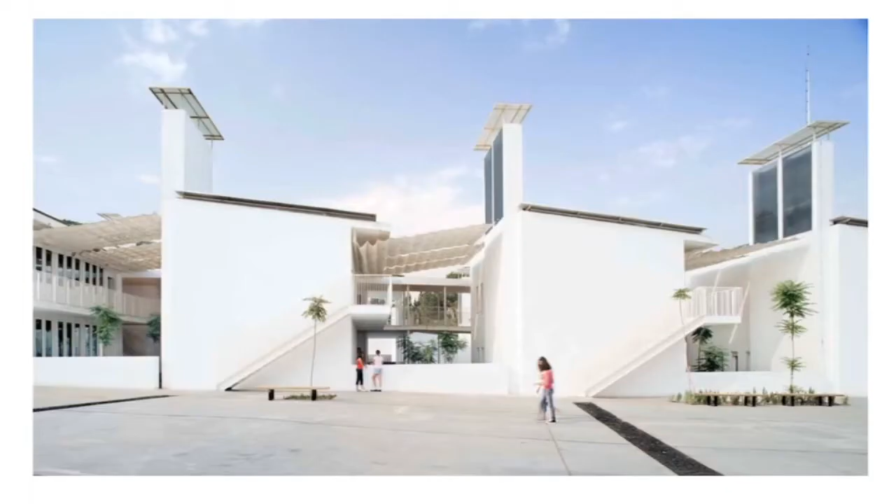The whole thing was done for roughly - don't know in Norwegian kronas - but roughly 500 euros per square meter, which is extremely cheap. Here you see the air inlets, and then it goes down at a certain depth, runs up. We have plants, and here you see the retractable shading, or the beginning of plants. It's really a nice setup. Here you see this solar wind tower with the spoiler on top.

We made the experience that the construction culture is a little bit difficult in these countries. For example, we had roughly 80% of the spaces which work very well, 10% doesn't work at all. So we went there and checked it, and at this 10% we figured out they had too much concrete, and they put the concrete in our air ducts, so they were filled up with concrete, so there was no ventilation at all, and a couple of other issues.

So maybe in future we have to be a little bit more careful, a little bit more space for our concepts in these kinds of climates.

So this cloud stuff - roughly 8 years ago, we're doing the exhibition booth for Mercedes-Benz at the International Auto Fair in Frankfurt, for 15 years roughly. The company in charge of that approached us and said, we need a kind of event for a big fair in Frankfurt, related to buildings, so do a brainstorming and come up with some great ideas.

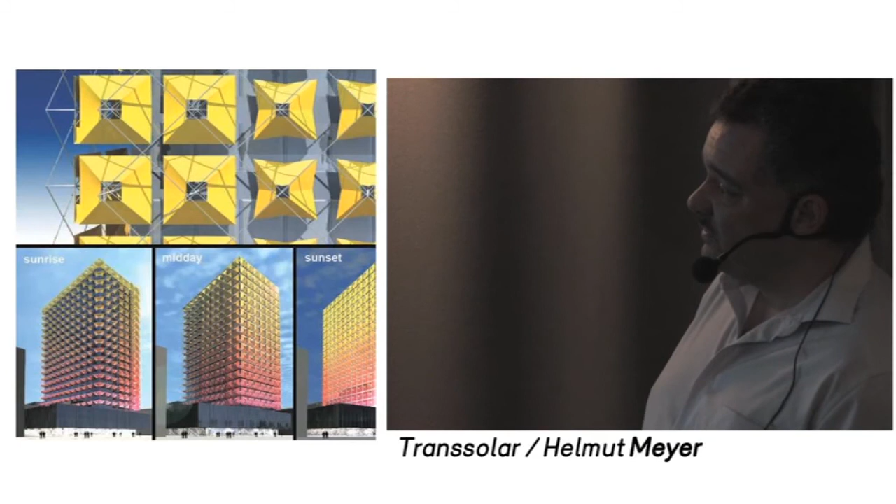So, Athens, the Piraeus Tower — you might have a look at this website, www.cloudscape.es. I think all the contributions to the competition, comments and so on, are still there.

Here's a nice idea about shading and a different appearance during the day. But the one I really like most is a high-rise from the 70s in Athens, proposed as a refurbishment. I'm not sure if you'd enjoy having your working place in there for more than a couple of weeks, but as a picture, as a principal idea, I think it's really gorgeous.